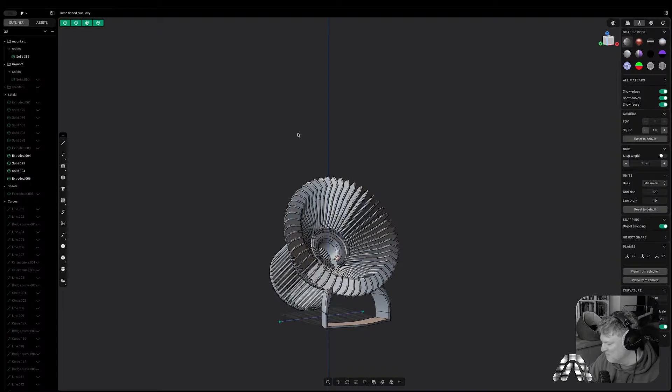The results are in. The book nook competition has finished, and I'm really unsurprised to announce I didn't win. So should we have a little look at who won though? Because I have to admit, it's really, really good. Let's just have a little look first, because I have to admit, and this is no slight on anybody's work, some of the ones that won the backup prizes, they're good, but I think mine was better, but I'm allowed to think that. Contests, here we are. But the winner, brilliant. Let's have a look.

So actually the winner isn't the one I liked best, now I think about it. It was this one I liked best, the Reader's Emporium, which, you can tell they put a lot of effort into it. The June one's pretty cool. The Victorian Clock Tower is pretty cool. They went glueless snap fit. I went no snap fit, glued.

And I'd seen this one knocking around on Instagram for probably about a week and a half beforehand. And it's such a cool concept. It swaps, I think it swaps anyway. I think that's what they're getting at here, that it swaps the interior when you open and shut the door. Yeah. Which is a really, really cool idea, actually. I can see how that one won.

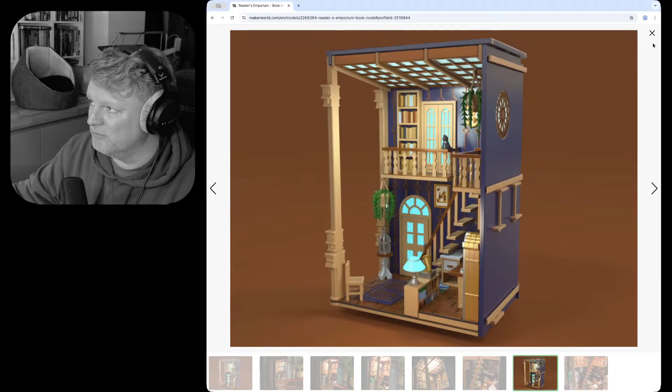I love this plant. Absolutely love that detail. And I love this skylight as well. That's such a good idea. I wish I'd thought of that, actually. They do a lot of changing filaments at a layer to do this two-tone effect, which, if you remember on the streams, I said I really don't want to get into, because it requires people to know what they're doing. In the past when I've done it, you end up with loads of comments saying it doesn't work, the printer started beeping at me halfway through. So I tend to stay away from it, but it's got great scores, so maybe I just underestimate people.

But yeah, so that's pretty much the book nook summed up. I probably am a little bit disappointed I didn't get one of these excellent participation awards. But you know what? I wasn't doing it for the competition. I was doing it for something that was good for the stream and was a bit of a longer project that could take up a couple of streams, which it did. It took up twice as many streams as I thought it would. But yeah, there's some really cool ones in here. Look at this bad boy.

Too cute. Right. So today I will openly admit, about an hour and a half ago, I didn't have a clue what I wanted to do. And I started just doodling shapes on my iPad. Oh, actually, no, before we do that, let's just have a little look at the lamp from Thursday.

So here it is. Looks pretty cool, doesn't it? You'll notice a couple of changes. I've added in a section here for a cable run so it can stand vertically if people want it to. It can also rest on its side fine at this angle. But I found when I printed it, it was a little flat for my liking.

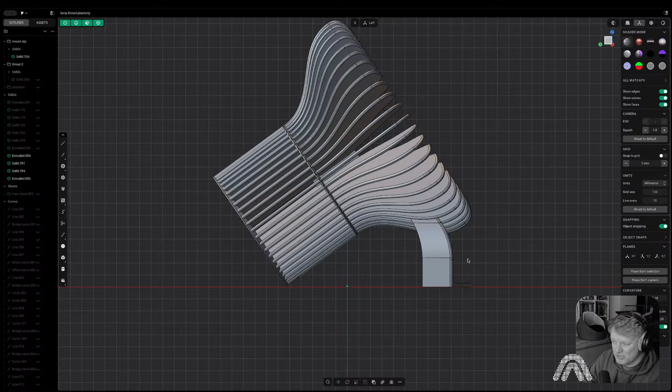So I thought I will do a little stand. Now the stand is currently printing at the moment, so I haven't fully tested this. It works great either way, but I thought, if you just want a bit of a steeper angle, so the light is more upwards, this little stand.

So this isn't the final design, but I'm just seeing how the tolerance is. This basically is just set to wedge in there just to keep things tight. So there's no connectors or anything, it just sits on it. And once I know this is okay, I'll do a bit more design on the stand. Although it's okay, it can be spruced up.

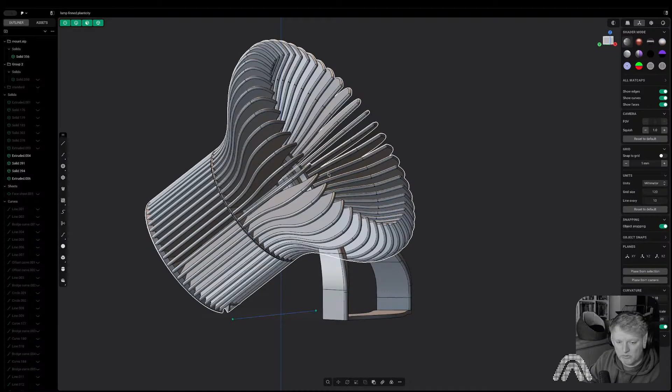So that's the lamp, which I have to admit, the lamp itself has come out absolutely great. I shared some pictures on Instagram and on the community feed on YouTube, and it looks really good. I'm really, really happy with it.

Actually, when I was thinking about it afterwards, I could have really got away without these, because the mount is acting like a rib. So I said on the stream on Thursday that I would prefer if it was clean and it didn't have these braces. And actually, I think I could have got away without them. But you live and you learn.

There is also a diffuser cap, which I think is not in this file that we're looking at here, but I've printed that off as well, and it looks really good. So today, as I said, I didn't really have any ideas for what I wanted to do. I was thinking I want to do another lamp. I'm in a bit of a lamp mood at the moment. I thought, right, just get the iPad out, start doodling some shapes.

And I'd seen some lights online which were like uplighters with bounce at the top. So the light is in the base, it shines up, and then you have some sort of shape at the top which bounces the light out. So it's more of an ambient light. It's not going to completely fill your room with light, but it's an accent.

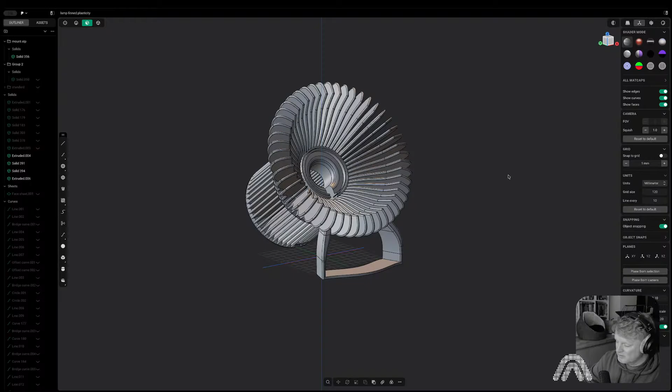So let me get up what I doodled. Now the doodles aren't great because I did them in about 2 seconds this morning. So this is kind of the concept. It's going to be a central cylinder of some description, and the light will sit inside of here, and then there will be 2 individual shade bounce reflectors, and I think there'll have to be 2 because I want to print them in a way that doesn't require 4 kilos of support. And they will then slide down into some channels, I think, in the cylinder.

So from the front, it'll kind of have this aspect. I think I'll probably make these a little tighter. That's a bit much of a gap between here and here. This is a side view, so I'm thinking about a circular top to the, what am I going to call them? Reflectors? Bouncers. I'm going to call them bouncers. And that would be the top view. So the light would be in here and the majority of it would hit the bouncers and shine out.

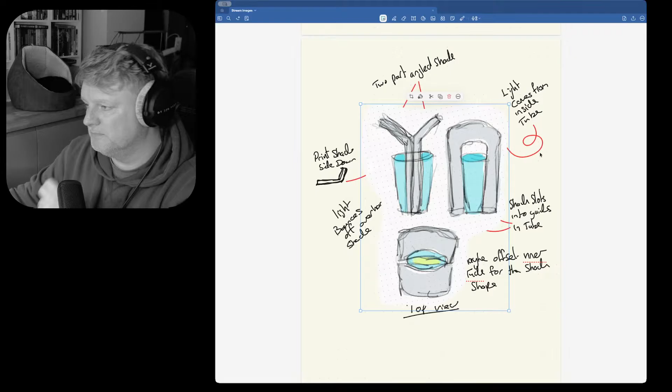Now, I think essentially we'll have to print the shade bit like this. So if you think that's a side-on view and this is the print bed here. If we design it so it can be printed that way, then we get away with any real issues with the overhang. I think this bit here will cause some issues, so there probably will need to be some support, but there won't need to be absolutely tons of it.

But excusing the sketching ability and the child's handwriting, I promise I don't have any children, and I promise I haven't been implementing child labour to do my designs. This is all me, all my original artwork, all my original handwriting.

I think we should be able to design this today. I don't think it'll be too complicated, but famous last words. So let's get over into Plasticity and let's start a new file.

Right. Let's just set a scale line. A scale line of not 1815. That would be a large lamp. So I'm going to do 240, just so I've got an idea of printer build height. Now I am going to bring in my lamp mount, simply so I've got a good idea of scale.

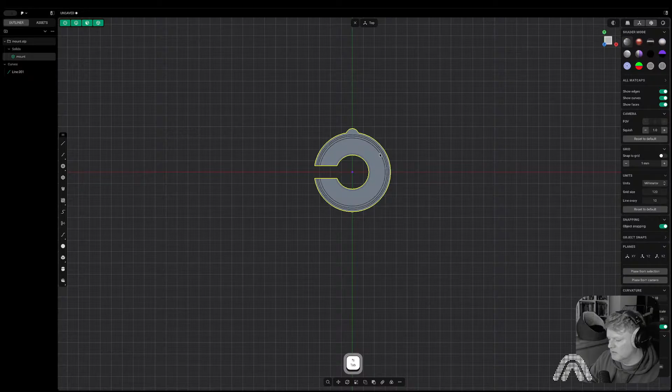Remodel parts, mount. Right, and I'm going to correct the center point because it's never right. Let's rotate it on the Z90, minus 90. So this just gives us an idea of scale.

So this is the bit that I've designed previously, and I use in most of my lamps, that fits the Bambu lighting kit. And even if I actually don't use it in this design, which I might not, it's just good to have it because it gives you an idea of scale, so you know how big the light is and, if you want to add a diffuser or anything like that, how much room you need.

So I think the best initial thing to do would be to draw the cylinder, or essentially the light to fit in. So if we say, let's just go 100, because 100's a round number, and obviously round numbers are better design-wise. So if we imagine, what am I thinking of? I'm thinking probably about there.

The reason I'm thinking about there is because I want the bouncers to go all the way from the bottom to the top. So it's like a full line that bisects the design. So it's going to have to fit in that 240. So like, say for example, that.

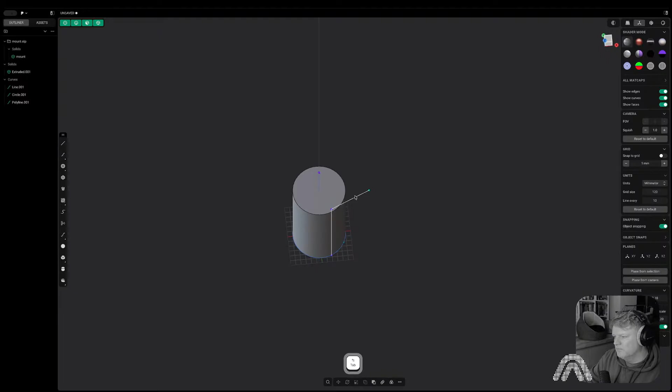But let's just see. So let's bring this into the middle by grabbing it and pressing Y to stick it to the Y axis. Now, first things first, I probably actually want this to be a little closer to the middle, and that probably means I want to bring this in a little bit. Now, let's just do this as a sheet first. The reason I'm saying that is it'll give us an idea of how wide we want it to be, because it's not going to be like this. This is not what I intend at all.

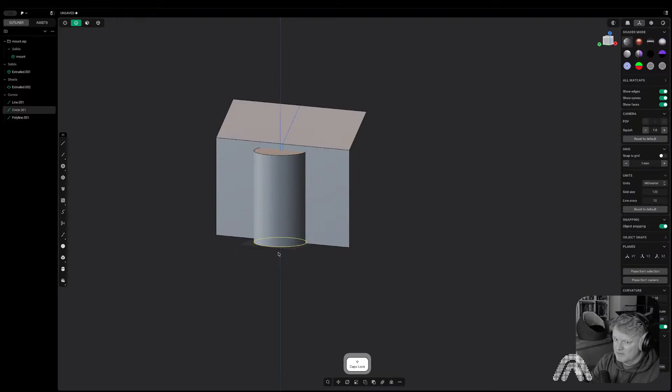But what I'm thinking I'm going to do is, if I take the shape that sits at the bottom of the cylinder and I offset it, that gives us like a secondary circle that we can extrude up. Well, I'll just show you, because it's incredibly simple and it sounds complicated when you're talking about it. So let's just go a bit further. It'd help if I had X-ray mode on, even though I despise it.

Right. So what I'm thinking is, we've taken that circle and offset it so they've got a relationship to each other. I've used it to cut this sheet. So now we have this, which could be one of the bouncers. So I'm going to put a nice fillet on here. Now, this is probably somewhere where there might need to be a little bit of support as well, because notoriously fillets straight off the bed are a big fat no-go. But I like to live dangerously, as they say.

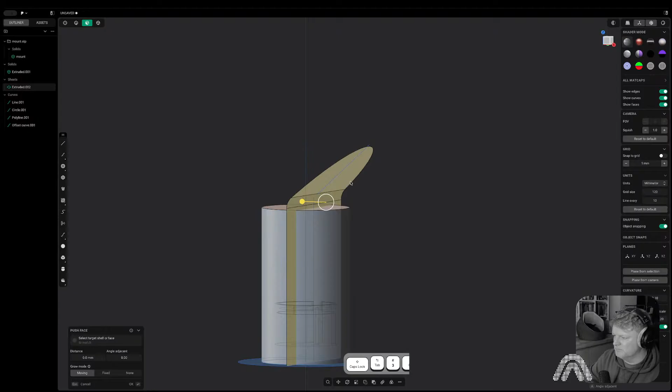Let's actually thicken it rather than extrude it. So F and then thicken. Let's get on the straight-on view so we can see what we feel about its thickness. More than that? Yeah. Now let's just mirror it across. Let's get X-ray off again because I cannot understand things visually in X-ray mode. So, yeah, I think I quite like that.

I think what I might want to do though is bring these in a little bit closer, just because the closer to the middle they are, the more bounce the bouncers will bounce. Yeah, that's better.

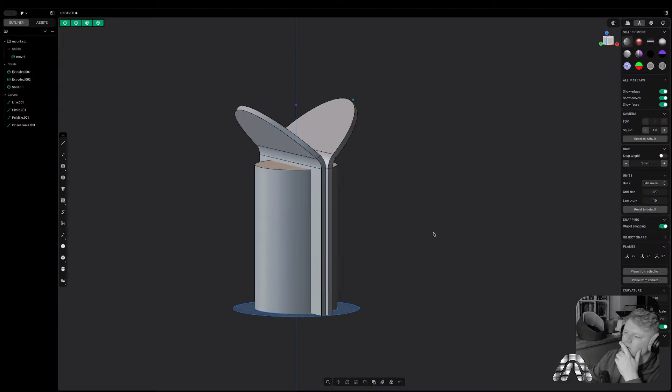Right. And now if we take this circle. This is what's great about Plasticity: you can totally get overwhelmed with curves and having too many curves, and I regularly do, but I'm never too worried about deleting curves in Plasticity, because if you need them, just switch to edge mode with 2, select the edges you want to start with again, press Shift D, and it gives you a curve that's basically stolen from that geometry, which is great.

So what I'm going to do is offset this one in like this, and then shall we cut upwards?

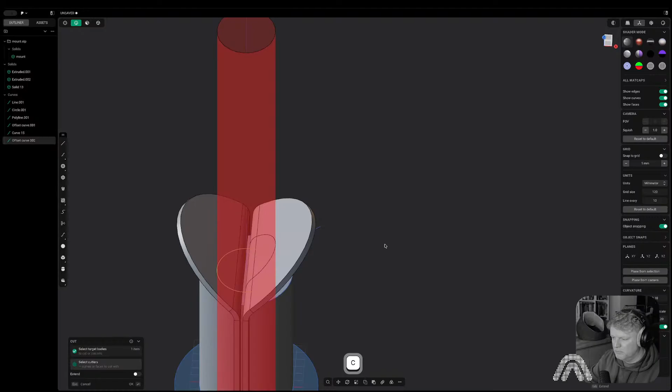So yeah, I think a little chamfer on the outside there. Actually, before we go any further, let's just check how we're doing for intersecting with the mount. Yeah, so we would intersect with the mount. So these actually need to come in a little bit.

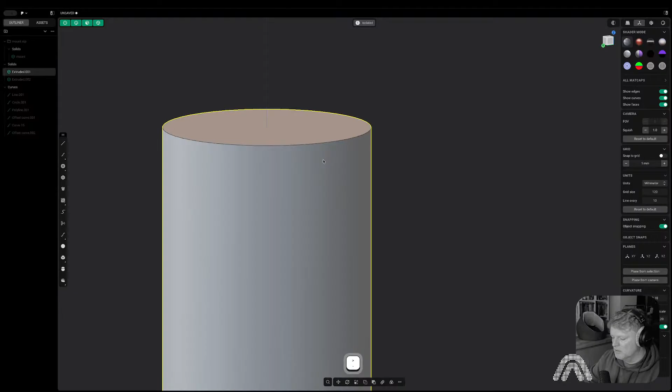It's too... if I get rid of this, you'll see what I mean. So you see how this is hitting the mount inside. So if we have this slide down inside the other frame, you'd effectively have to cut channels in this as well, which would probably be okay, but because it goes across the channel where I have the diffuser, it just limits what you can do. I mean, it doesn't need to be there like that.

So if we do this, just make it a little wider. Yeah. And then the channels that we cut. So let me just do a little test just to be sure. So let's select the main body as the target and then do a Boolean against it. Let's keep the tools. So yeah, that channel cuts in there, no bother.

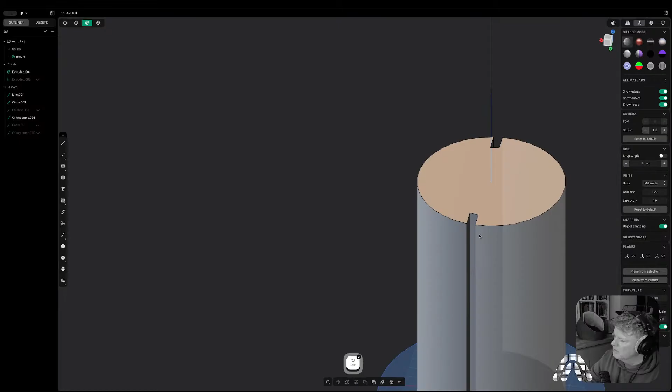So I think what I will do though is I'll just add a little bit of clearance on these. They don't have to be tight, because you want the bouncer diffuser to slide in easily. So let's do minus 0.1, which, do I want minus 0.1? Maybe a bit more actually. So let's do minus 0.2, which is of course on both of them, so it makes minus 0.4. Yeah. Let's do the same over here. And then I think ultimately we can just mirror this.

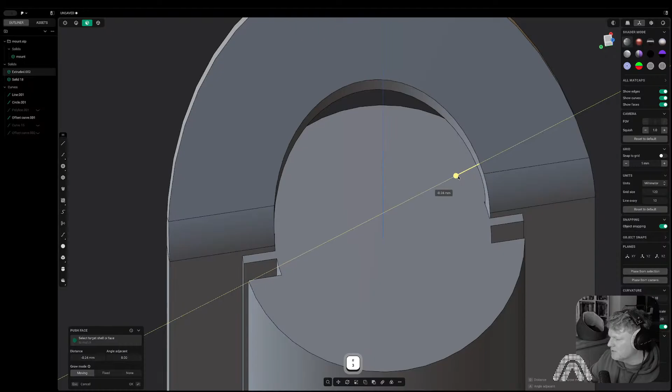Cool. Now, if we bring this back in, just add a tiny bit of clearance there as well. It's not just this and this face, the top and bottom, that has clearance. We also need clearance on this face because the part would interface with it there. So we should mirror this across, just get a look.

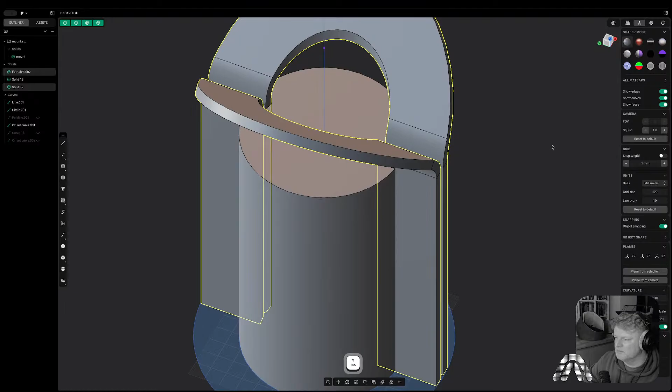I think what I might want to do is, I feel like that's too big an opening. Yeah, that's too big an opening, because if you think the light's going to be in the middle here, too much of it's going to be coming out like that. So what I might do is get rid of this one, because we're just going to mirror anyway, and let's imagine we're here on this face. So this is where the top of the lamp is going to be, so the light is going to come out of here.

So if we do Control R to add an ISO param, having to look around my microphone to see the keys. I really need to get my microphone / keyboard positioning sorted, but it's a little bit difficult.

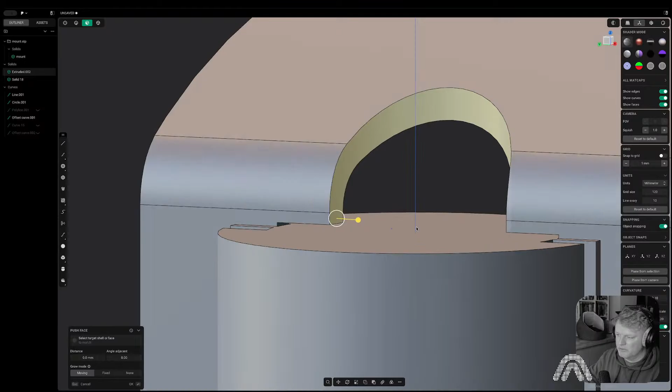So now we should be able to pull these in. Yeah. So we're effectively making the area that the light is going to come up and hit bigger, but we're not cutting into this for the channels. So yeah, that's pretty good. I put a chamfer on this side, so this is the side that's going to touch the print bed. But I think I will still have a little chamfer, but I'll not have them even.

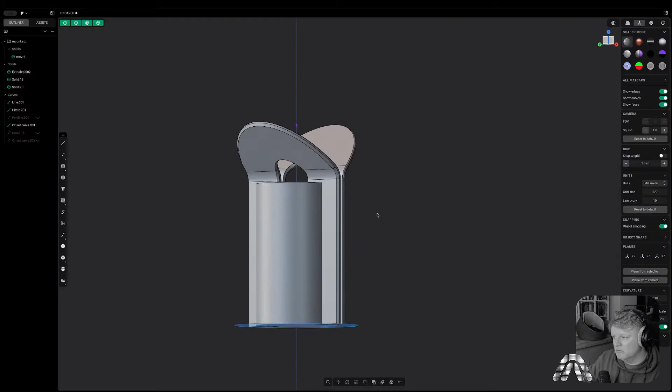All right, so that's the basic little concept. It's a bonkers lamp, as I say. It's more about ambience and looking like a cool, interesting thing on a shelf than let's illuminate the room. But I think some of the coolest lamps ever are like that. Lamps don't just need to be purely functional.

So for a brief period, let's forget about the bouncers and focus in on the actual chassis of the light. So what I'm going to do is hollow it. I'm going to run a hollow command. Now hollow commands and sharp edges, which is what we have in here, I haven't added any fillets, sometimes loop on themselves, but it's fine here. So let's just do 2 first and bring back in. I want the mount, I don't want the bouncers. Just to see how much room I've got, you see.

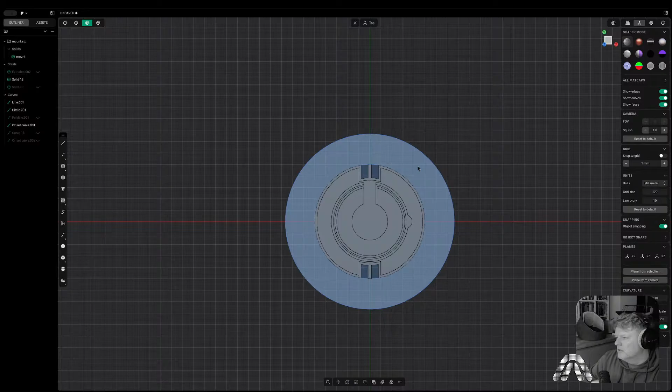So I can make those walls thicker. The reason I'm checking that is because the light will be inside. So really, if they're a little bit thicker, you can get away with more filaments to stop the transmission, because if it's really thin, you'll need a dark or a matte filament. If it's a little bit thicker, you're never going to get away with white, but you can sometimes get away with like a blue, or I've actually done the turquoise a couple of times that Bambu sell, and that can be quite good for stopping transmission. The best though is charcoal.

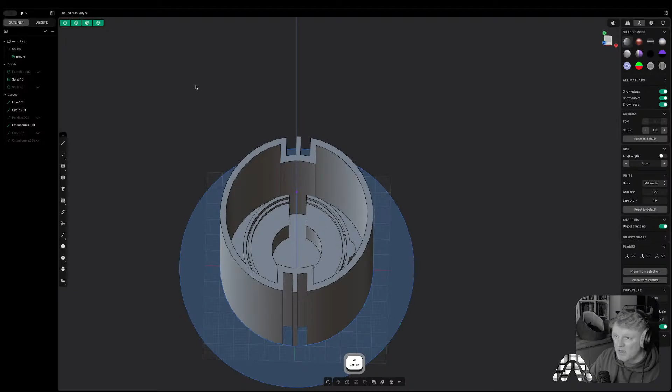I've already got it behind me and I will at some point finish it and show it on stream, but I've actually designed and built an entire home NAS. Actually, do you know what, I might just get it up on stream so you can have a quick look. Let's save this first though. Let's just go into lights, let's just call this bouncer, save it. But yeah, just have a look at this absolutely bonkers thing that I built a while ago - 3D printed server. There it is.

Let's just go merged cage version. Yeah, bang, look at this bad boy. It's really cool, it works great. I have to admit, all I need to do in my one at home is add the second cage, and then do I have the front panels?

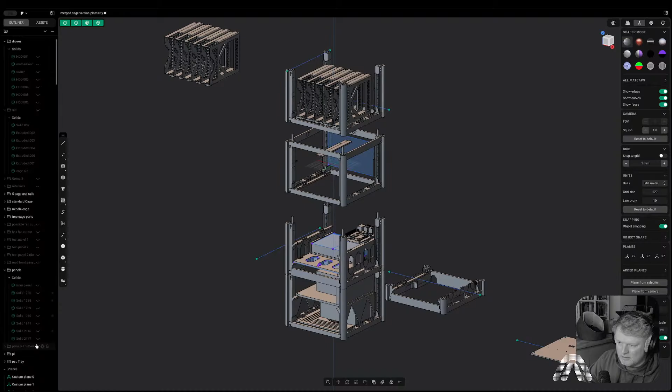No, I don't have the front panels on this one. And then there are curved front panels which go on all of this to make it one vertical unit that can actually just get extended by adding more of these drive cage mounts. Motherboard, it holds motherboard, holds a network switch, the PSU. It's also got this shelf up here to put some Raspberry Pis on if you use Raspberry Pis in your home lab setup.

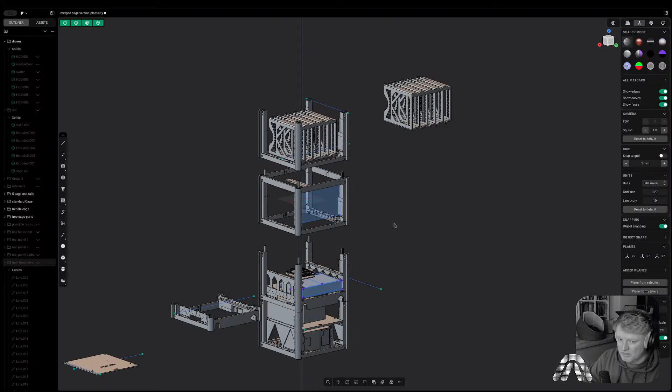But that was a big one I did in October. It's not on MakerWorld because I haven't personally finished it - well, it is finished, but I haven't printed and built it out, and I'm not going to upload it till I'm 100% sure I'm happy with it. So, but I just thought it's pretty cool, I can't even remember why I mentioned it now. But yeah, look out for that in the future.

So back to the light. So we want this, not the top necessarily, because we want it to be funneling the light up through the chassis of the light anyway. Now, one thing I do need to think about is the cable exit.

I think what we'll do is we've got two options here. So the disc light, the LED light from Bambu sits in here, and then the cable comes out. Now, obviously the cable would come out where we're going to put these little bounce reflectors, which wouldn't be ideal to stop them. So we've got two choices really.

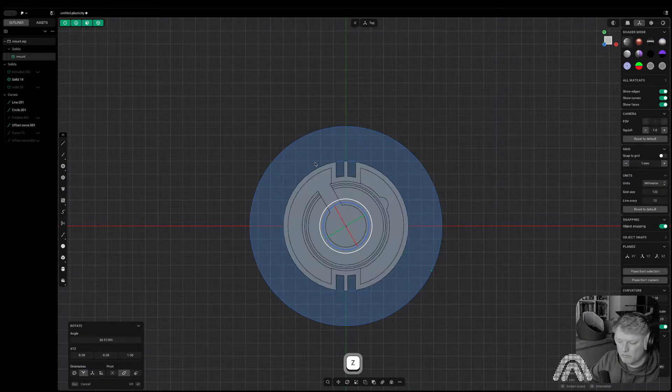We can either rotate this slightly and just have the cable come out non-centrally, which is the easiest option, but for some reason I find incredibly triggering, so I'm not going to do that. No, I'm not going to do that. I promise I'm not going to do that.

So I think what we'll do is we'll actually fill in here a little bit. Oh, but that's not going to be - I don't know if I like that solution either.

So what I was thinking is you could essentially have the back bit here, these fins be a bit shorter, and then have the cable come out underneath. Don't love that solution either now I'm thinking about it.

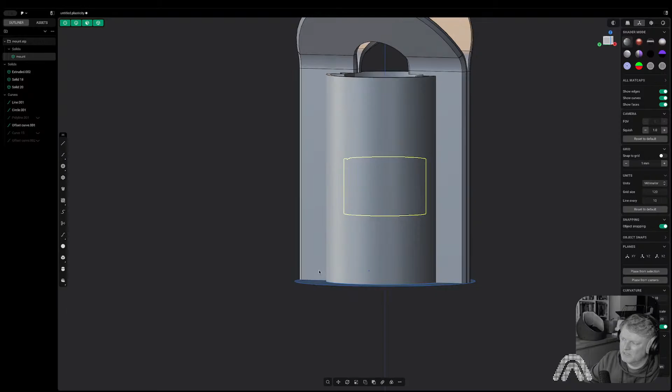Because if you have the light on a shelf like that, for example, it's not so bad that you could see it, but if you wanted it sideways, you'd then have this section here missing where the cable would come out. I think that would look crap.

I shouldn't have made a promise, should I? Because actually, I think it probably does make sense to have the cable come out slightly on an angle, because then you've got options. If you want to display your lamp slightly on the side, you can display it the way that the cable comes out that way. Yeah, I actually think that is the better solution, even though I made bold promises.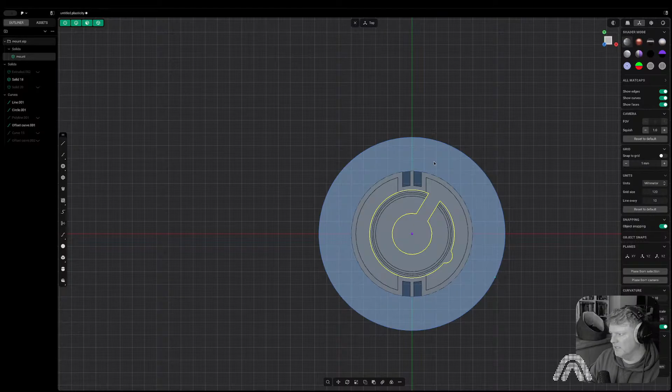And thankfully, there's zero accountability on the internet, so I can go back on those promises with absolutely zero guilt. So let's just rotate this a little bit and let's have here be where the cable comes out. So the puck will be here, and then we'll put the hole for the cable here, and then we don't have to mess with these rails or these guides for the bouncers at all.

So what I'm actually going to do is just take these lines, duplicate them. Let's bring them down just so I've got some idea without having to have X-ray mode on where that cable channel is. And then I can just draw straight vertically down.

Just make a little surface here. Need to make it a bit bigger.

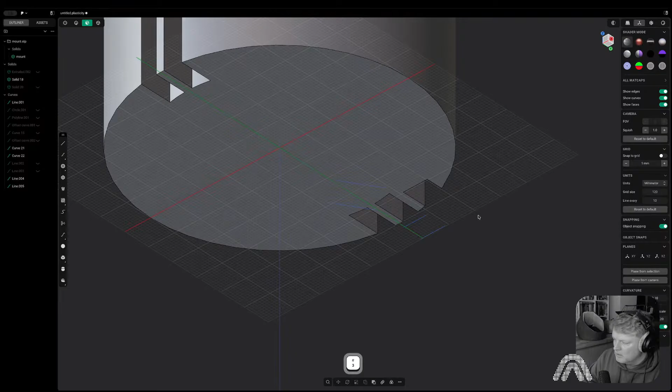Hide some of these because they get in the way and you can't select faces. So that is going to have to be bigger, because top tip if you're ever designing for the Bambu lighting kit, it's a wonderful cheap light, but if I had £1 for every time I've designed the lamp and forgotten that the cable has a switch which has to fit through this hole, I'd have about £3. Let's just make this a bit wider, a little bit taller.

Actually, how big is that? 14mm. I don't have that lamp on me, but I'm 99% sure that's fine.

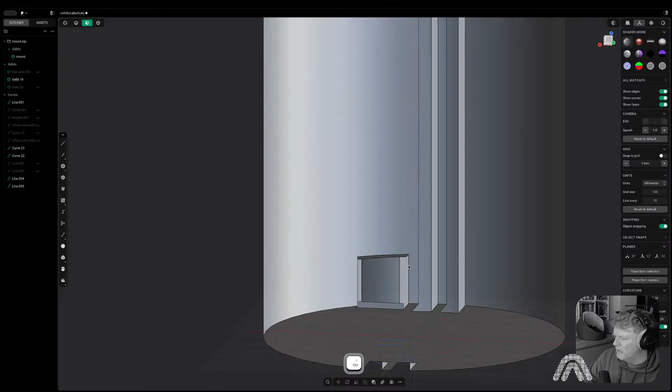Let's bring this to here, just so everything's nice and flush. And if we put in a couple of, what you prefer to do, you can do - what I'm trying to do here is get rid of any overhangs, to get away with zero supports if possible.

You could just add chamfers like that, or you could add fillets and overdo the fillet so it goes past being a full fillet and you get this arc. If you keep going, it gets a steeper arc, which I prefer the look of. Then we should be able to just select these faces, grab on the Z, pull it up.

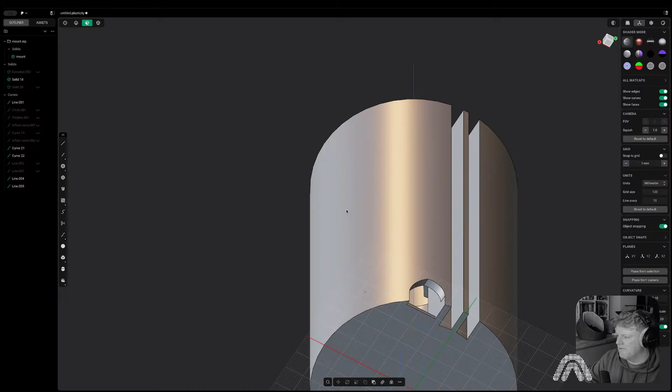So let's get a section analysis on, just to have a little look inside. So another thing - obviously this is free floating, so this would need supports in here, which would be defeating the whole point of trying to avoid supports.

So I could just pull this down, but that adds loads of material. It's completely pointless. So I think what I'll do is I'll actually join it to the body.

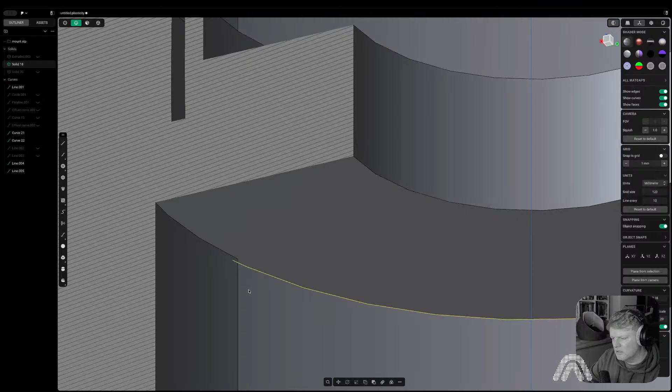We definitely don't need all that because it's just not needed here. And then - oh, what's going on there? Am I not? Oh, of course, it doesn't touch on the outside, does it? Right.

I think we're gonna have to extend this all the way out so it fills that gap. Because now, obviously, I've just talked about not wasting material, and that reads a little bit like I'm wasting material. But there's overhangs, and then there's overhangs which are circles, which are absolutely guaranteed to fail. So we don't want that.

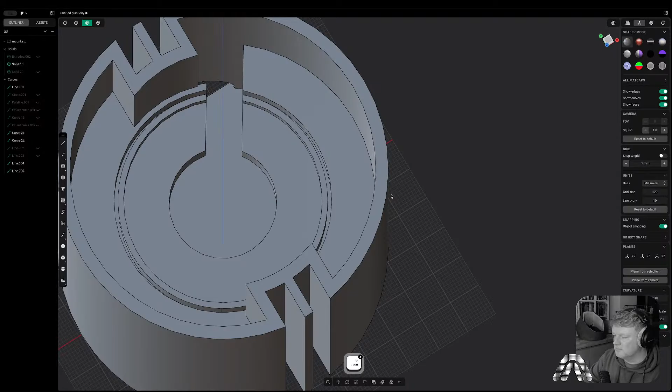On this face here. Right, so now we should be able to just put a nice chamfer in on the bottom here.

And then we're getting away with using not as little as possible, because there's definitely ways you could do it. Has that gone all the way around? Yeah, it has. Let me just double check that.

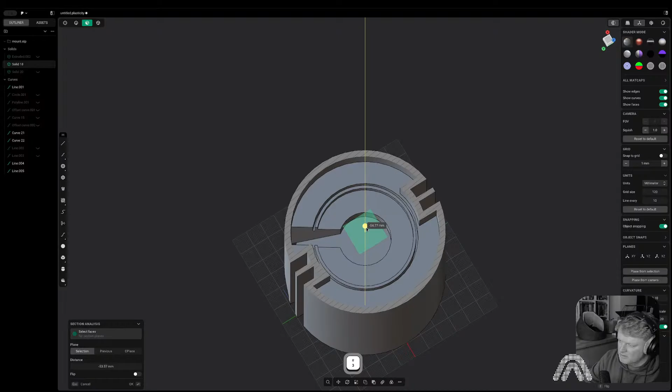So selecting that face and then selecting section analysis means it's on there. Yeah, all the way around.

It's actually quite a good way of guessing what the slicer is going to see. So down in this bottom corner there, you can see that's quite a steep overhang still, but it should be fine.

That's all good. I'm going to bring this out. Just noticed that this was...

How do I want to do this? Yeah, I'll just draw the circle again. And then steal this geometry. And then that gives us that.

And I can just pull - don't necessarily care about it being the same, but I just want more area for the print bed. More is always better.

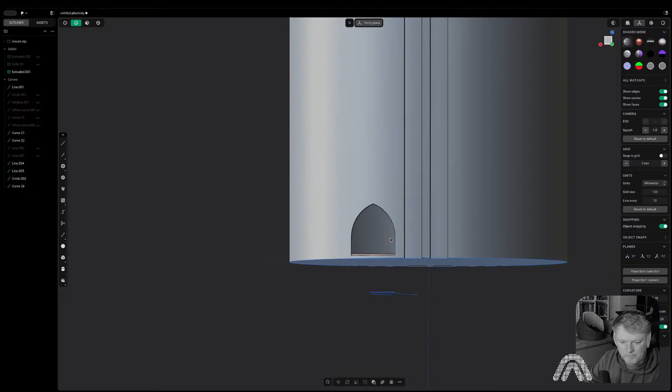It's like a little mouse house. Now, I don't like this straight top.

Let me pull in the bouncers again. So what the question is, do I want that kind of curve? I don't think I do. Or do I want that kind of curve? I think I do.

So what we need to try and do here is - yeah, it'd be a good idea to just add some guidelines first. So all I'm doing here is adding a line that I know is on the center, with a known point that I can start drawing my curve from.

Then I can draw it to the center, and then I can draw it the same on the other side, and then I know I'm getting a nice arc, and then I can scale this in the X direction if I want to change. So if I do spline curve and I go to, let's just say here for now, and then to there like that, and that gives us a perfect little arc.

So then if I bring that down and I do a cut, yeah, I feel like that actually makes a massive difference.

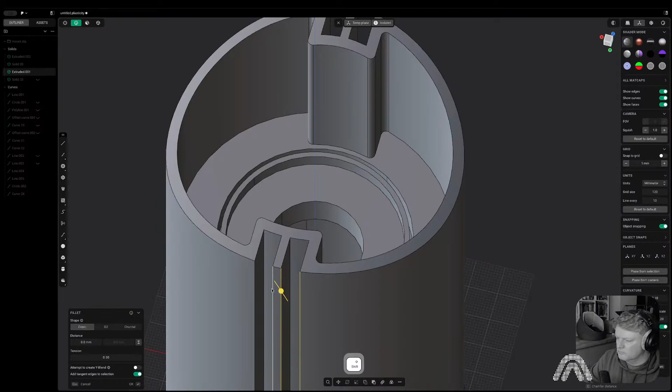So say, for example, now I can select this edge here. And you see how it takes the whole run? So I'm selecting this one edge and I can actually select everything because of these fillets. If they were still right angles, it would stop there. As you can see here, because I didn't fillet the insides of this, it stops at that right angle, which sometimes is actually quite handy.

I think I might actually chamfer these. I don't know why. Don't want to add a fillet internally here because we'll have to do the same to the bouncer parts.

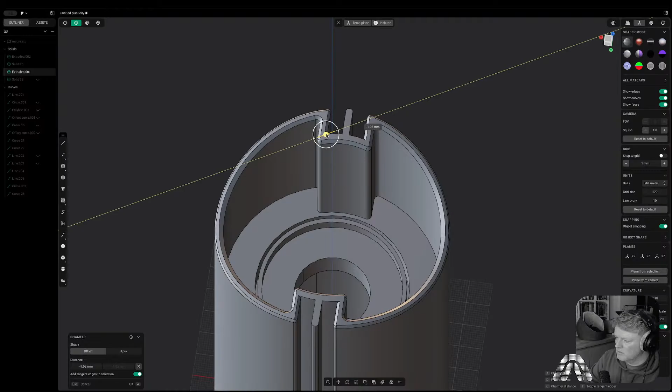Let's have a look with these back in. Quite like it. Of course, we added that curve, so now these don't match up with the surface because we chopped a bit off, didn't we?

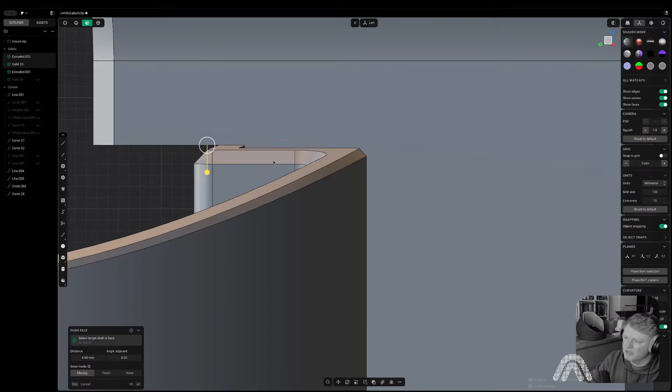So let's just eyeball it. There you go.

So I'm thinking, this is the bit where sometimes when I design stuff and it's relatively quick, I look at it and go, right, what more should I do to it? But I don't necessarily know that I want to do a great deal more to it.

I think I could add, I think I might rib this. So let's just take a copy of it. I actually think I won't need the ribs. I think what I would do is print this with fuzzy skin.

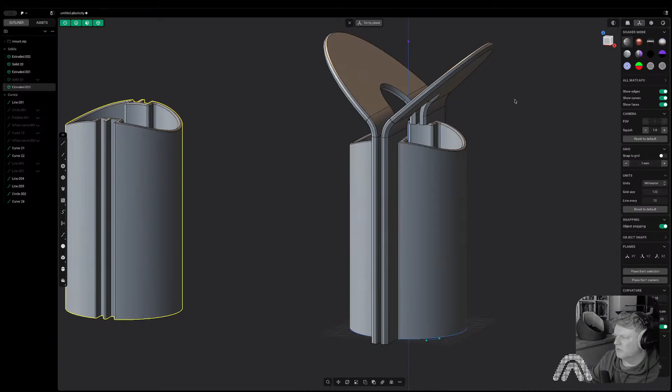I feel like I might want these a bit thicker, but let's just... So I can actually bring just this face out a little bit to make them thicker.

Then they're not with this. I mean, I could just select these two and then redo the grooves, which wouldn't be an issue because we've got plenty of room on the inside.

But I think I prefer them. Let's just have a little look. That's just ridiculous, but I just want to see what I feel about thicker. Yeah, I prefer thicker. Super.

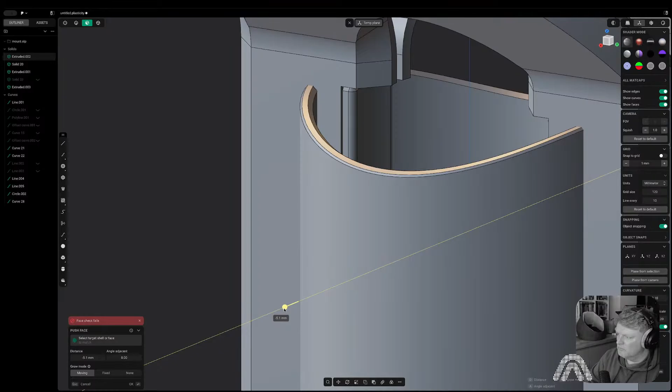So glad that I did all that filleting. But that's too thick because that will actually come. No, you know what? Do I actually? Is that what I want?

I think that's a better middle ground. Feels a bit more substantial than this.

So we'll have to add some material in the middle here, which, because I added those fillets, see how easy that was to select all of that face? So selected everything together. So now I can just add, not too much, because there'll be a point where the corners will intersect with each other.

See here? So once that starts to go over there, it has a little bit of a computational nightmare. But can I get rid of these? Can, but I'd have to do...

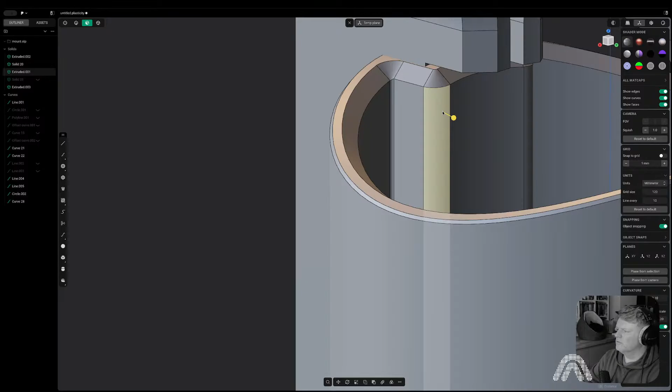Let's just do this so it makes it a little bit easier to add the thickness we need. I'm just going to take some of these fillets and chamfers. Fillets and chamfers, not the whole thing.

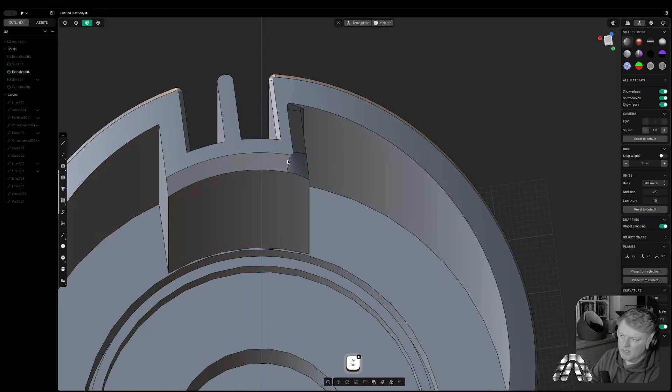Just means we can re-fillet them once I've got the dimensions that actually want with the thickness of the bouncers. I don't know how many times I've said bouncers, and it's a ridiculous word for what I'm trying to communicate, but so

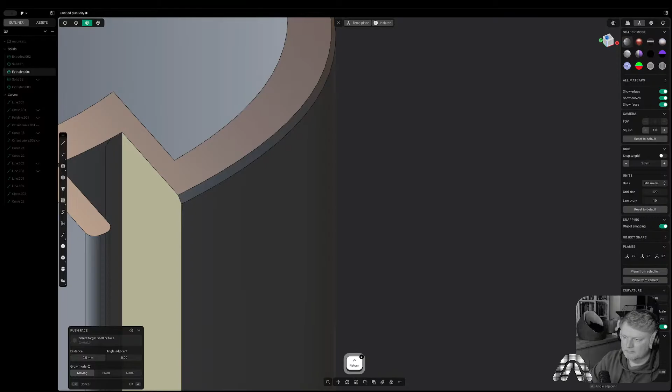Let's get this, take away this, so it's cut away this extra area here, keep the tools. And just add a little bit of that clearance back in. Do the same on this side.

Right, now let's just... No, let's not just mirror it across, because actually we can. Watch this. Yeah, we can mirror it across, but I'll just have to separate inside first, because obviously this is...

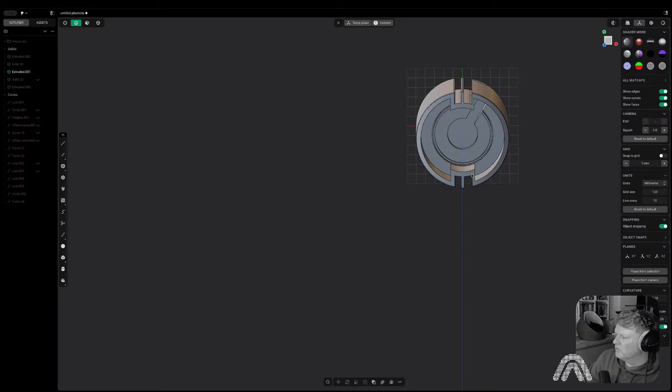Oh no, I don't want to mirror it because I've got that hole there, haven't I? So let's not mirror it. Let's just do it properly. Although, no, I can just do this.

He says with unbelievable confidence, might I just add. Wicked. So that's effectively just, because I cut that out and then I mirrored it. It's just mirrored this section. So I've not then re-mirrored the hole and all this mount.

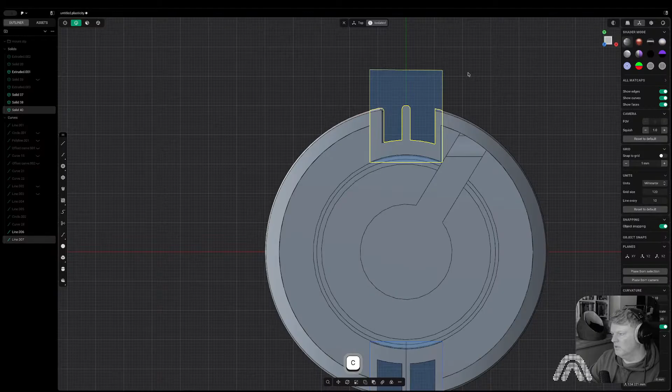So let's actually mirror this up to there. Cut that out. Be shot of that part, and then can I select these two, and can I mirror them up? No, let's not do that. Oh no, it does, fits perfect.

And then boolean them all back together. And don't keep the tools because I don't need them again. So now, if we get rid of this, I won't get rid of that one, I'll just hide it, and we mirror this one across.

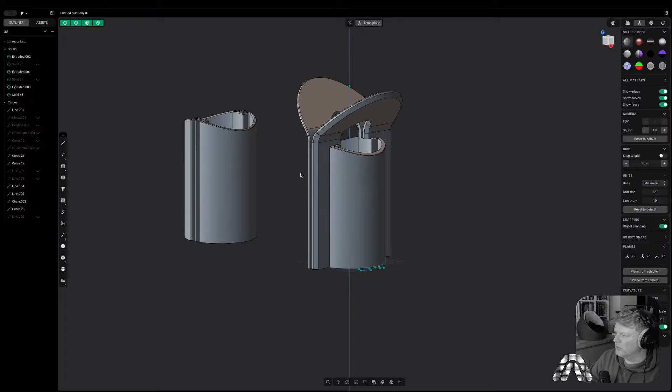Yeah, that was worth doing. They look better. Yeah, definitely prefer that. So

Shall we add back in? I actually don't think we need the internal ones now because it's set, but it does look a little bit nicer when there's a bit of a fillet there. And actually, you can see these edges, so let's just fillet them anyway. Takes seconds.

So get rid of this because I'll only end up printing it by mistake and it's no longer fitting the bouncers. So that's my backup. Now, I think what I'll end up doing is printing fuzzy skin. The only thing I have to be careful with the fuzzy skin is

fuzzy skin, effectively what it does is it takes your model, and when it does the paths in the slicer, it adds a little bit of wobble and a little bit of wibble to give you a texture, but that is at the expense of the dimensions that you modeled. So if something's 10 centimeters wide, with the wibble and the wobble, well, you can actually set the distance in the slicer, it might be 10.8 or something like that.

I can't remember what the default is, but say, for example, here, where we want these to slide into here, if I was to print this fuzzy skin just by default with no changes, it would probably take away the tolerance we've added. So I'll probably have to select these faces in the slicer when I do the fuzzy skin, or I could just add more margin. But adding more margin means if I don't do it fuzzy skin, or somebody prints it without fuzzy skin, they'll be rattly.

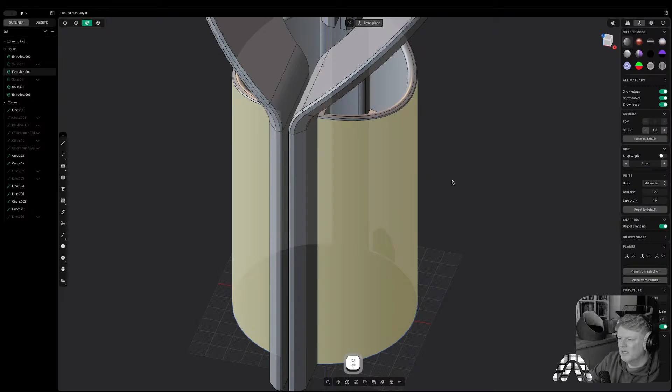And one thing I have learned is lamps sit on the side and they don't need to be moved, they're very stable static things, but for some reason people get really upset when things aren't tightly glued together. Anything that moves even a little bit tends to be the only thing that ever gets said about my lamps on MakerWorld. So I do try to make things have quite a tight press fit tolerance.

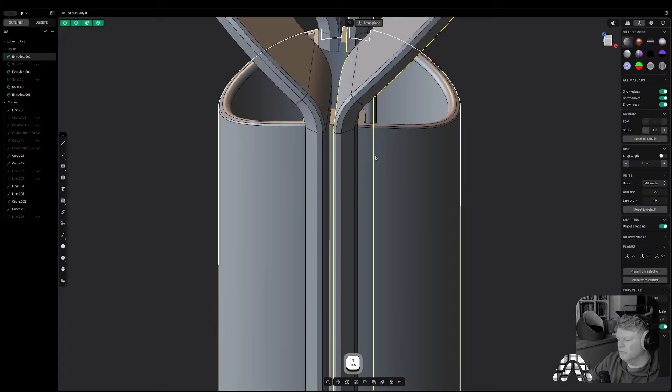Imagine you just did fuzzy skin and you had all three sides adding, say, 0.8 or 0.5 with the fuzzy skin, it would close that up to the point that they wouldn't be able to fit in there. So what you would do in the slicer is just do these faces, potentially with a modifier. I think actually you can now paint fuzzy skin, so possibly you just select the face, but I'll have a look when I put it in the slicer.

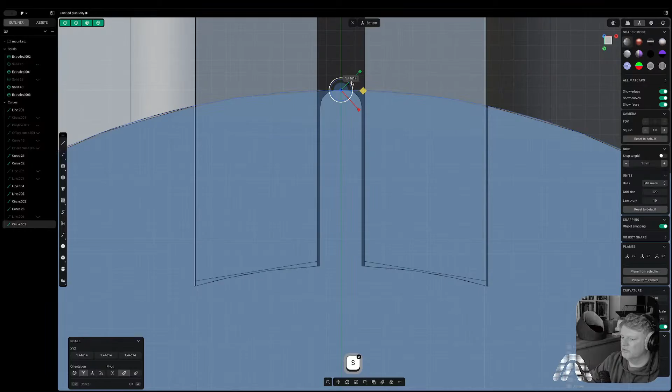But in addition to a smooth one and then a fuzzy skin added in the slicer, let's just add a ribbed version for your lighting pleasure. The way I'm going to do it is, should we do 1 millimeter? D1. 1. Bang. Is 1 millimeter ridiculous? Yes, it is. Let's do 1.5. Well, let's see what it looks like. So let's select this. Has this selected it all, or has it got a sneaky little slice? No, it's all right. Let's pull that all the way up to the top.

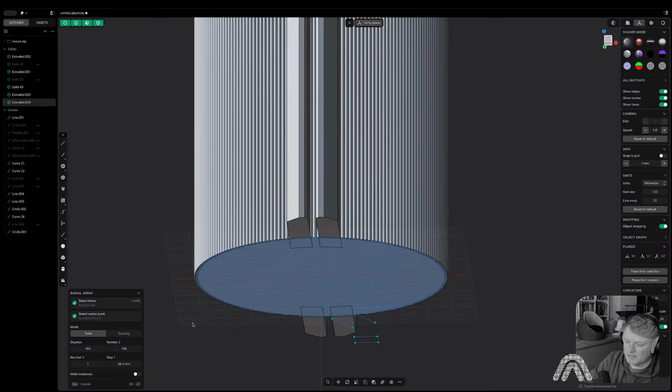And let's now do a radial array and just add 6.3 million of these things to get a texture. Even number. That is an even number. Yeah. Now, 196. Do I dare Boolean? I do. But I save first. Actually, do they touch? Well, yeah, they do touch. Right. Fingers crossed, guys. I'm going to do Boolean on 196 things at once. In Fusion, this would definitely kill it.

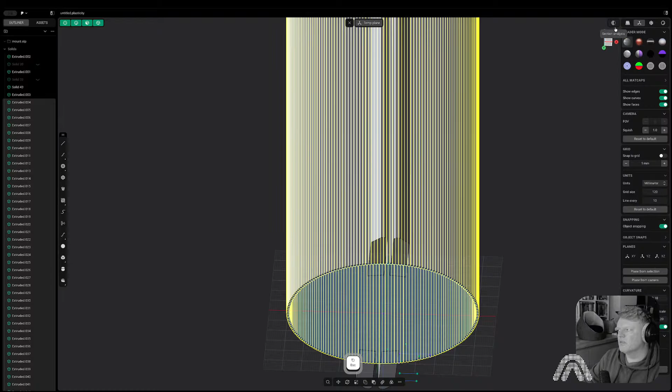Oh, that's literally done it straight away. I actually expected to have to sit and wait. It hasn't. So they mustn't touch. Oh, they don't, look. I want to do this then. Might just do a few more so they actually touch, which is a ridiculous way to use radial arrays, but let's just keep adding them. Yeah, so now there's this intersection here.

So now we can really see whether, right. Oh, I didn't even get a chance to get my cursor there. Did it straight away. Bang. I don't know, Plasticity is excellent. I think this machine is also excellent. And to be fair, these are all very simple shapes, but I have seen things explode before.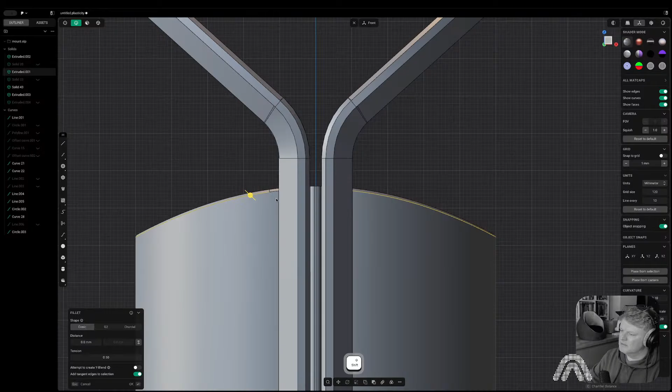So let's just hide this for now. And what we want is this line, and is that different? Fingers crossed when we press delete redundant topology here, it just gets rid of it. Didn't. Why is that there? Why is that different to the other side? I don't know, and I'm not going to get obsessed with this. Is it the same on the other side as well? Yeah, it is. So it's obviously something when I mirrored it, but it really doesn't matter.

Do I have that original curve that I used to do cutting? I do not. Remember me moments ago when I was saying you can just steal geometry back, so I delete things all the time. But, oh, actually, to be fair, just use this.

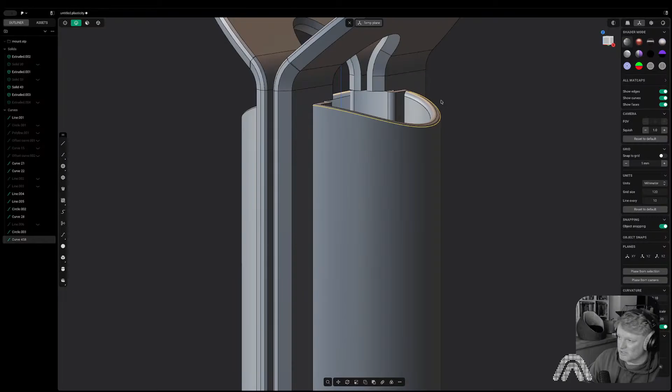Can we just use this? Let's just try and extend this. So what I'm trying to do here, I'm just chuntering away at myself without actually explaining. I'm just trying to get a line that I can cut all those pipes with, so we're just on the body. There are other ways to do it, but don't, yeah, that won't extend, right.

Just go scale on the X0. Just to get it flat, so it's planar rather than curved. Might now actually let me extend it. Whoa, look at that for an extension. Hey, thanks, Plasticity. That's exactly what I meant. Not.

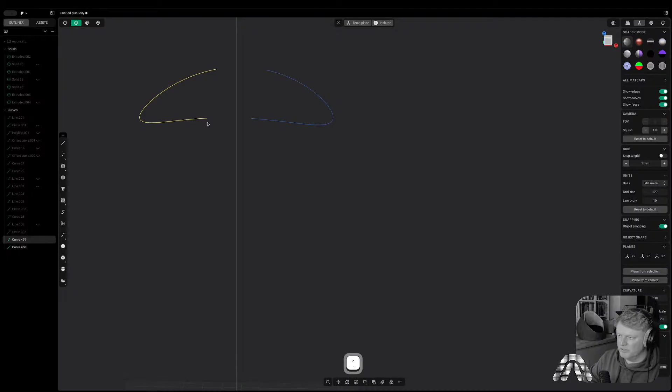Maybe it would just be easier if I did this. Shift D to duplicate those, and then if we get these and we isolate them, and then we do this point to this point and we loft, we just assume G2 is what we need. Make a surface out of it.

So now if we pull back our pipes, actually we need to extend that out, don't we, because it doesn't go far enough. The mathematics that must go on when you're doing stuff like that, because it's bloody magical. So let's select this and then this and do a Boolean.

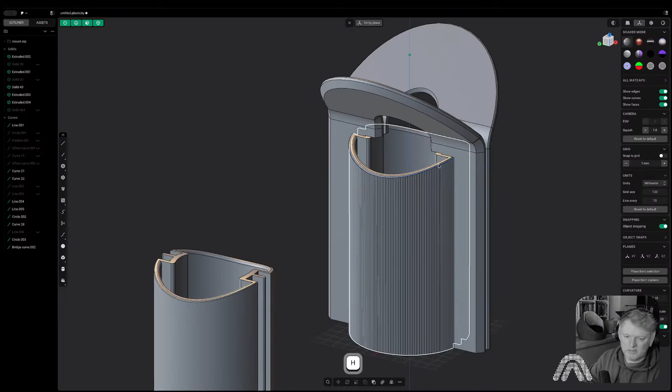Oh, would you believe it? Look at that. So now we have this ribbed pattern which goes all the way around. Well, actually it doesn't go all the way around because we need to get rid of it here. Because obviously then the things wouldn't be able to slide in, but that's not a problem. But it nicely comes up to this edge here. Yeah, that's great.

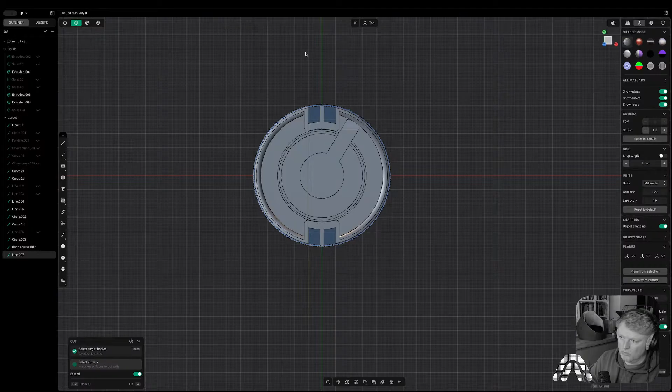So let's just take this line, scale the line on the Y, make it really long. Actually, I don't need to do this because they added this great new feature in Plasticity. What I was trying to do there is make that line long enough that it cut through the whole thing. But you don't actually have to do that now, because if I select this and then I select extend, it automatically extends it to make sure it goes through the whole body. Which is a super little feature, but it's a massive time saver.

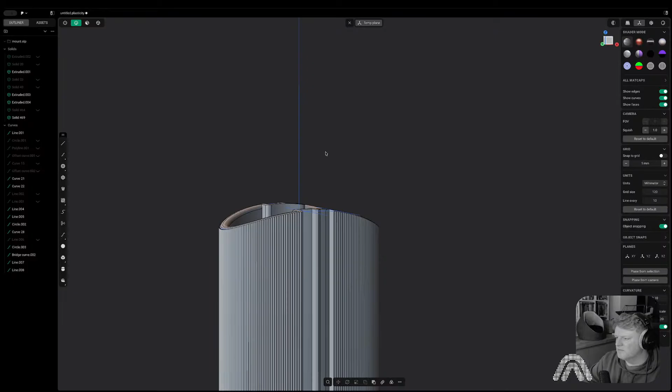Could zoom in rather than trying to pick 1 pixel. Let's just add some little fillets on here just to make my brain feel better. Yeah. So we didn't do an even number the second time around because it's not the same on the other side. But whatever. It's 0.5 millimeter different on one side to the other. And let's Boolean all of those together.

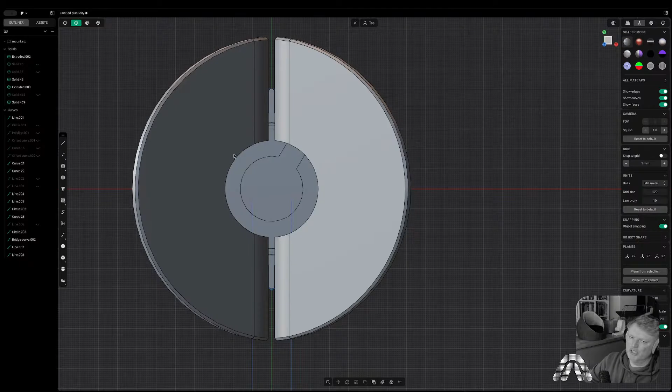All right, cool. So let's bring in those two bouncers again. Not that bit. We got rid of that bit. So light sits here, shines up on these, and just gives you a little bit of a glow and a little bit of bounce lighting. Now, I could add something in here. Some sort of coloured cap, so the light that comes out the middle here wouldn't be entirely wasted. It would give a little bit of colour.

But I think what I'd rather do is test this print first and just see what I think. I actually think it's pretty cool. I like it. It's very modern. It's very different. It's actually weirdly got a little bit of a feel of garden lights, which isn't really what I was going for, but we're here. This is what we are.

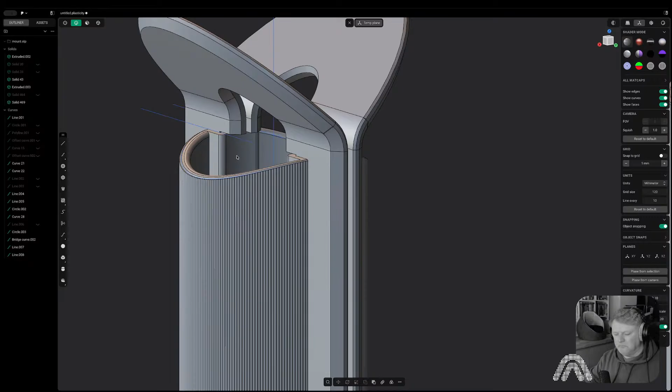Do I want to put in? Yeah, I think I might actually put in a little. Let's say fillet now. I don't actually think that's particularly good. Let's not do that. I think this might be the point where I go, it's finished. Or it's ready to test. It's not finished.

See, we missed something. The hole. The hole got covered when we did the ribbing. So, but it's okay, because what we can do is we can pretend that this is a great lesson that can be taught, and I didn't at all do that by mistake. So scale Y0.

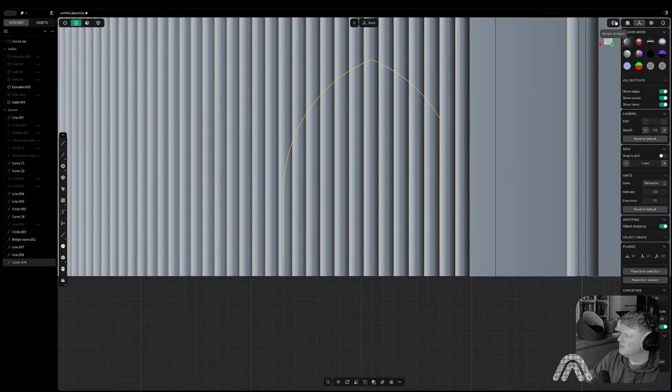Let's just do a little section analysis to have a look at where we think the flow is. Okay. I'm getting something wrong here and I can't quite figure out what it is. Why?

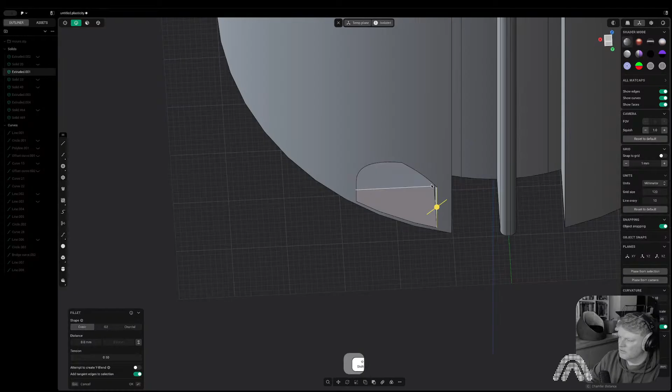I'll actually just do this instead. So get rid of the section analysis. Don't join these yet. Get just this. And then we can grab the direct geometry.

And then if we bring back that side's pieces, and we cut it. Yeah, that definitely was what I meant. I actually didn't realise until relatively recently that the cut plane goes based on your view, or as near as it can do. Must have just been doing it automatically without realising it, but there we go. Perfect. I'm actually not going to join them just in case there's other changes I need to make in the coming hours once I've tested this.

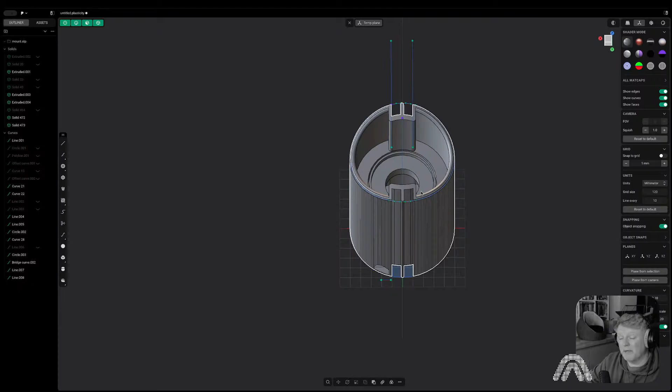Will this go on the test today? Depends how the stand goes for that lamp that we showed at the beginning. If that goes okay, then yeah, I'll get these on today. I actually need to pick what I'm uploading today to MakerWorld. I haven't uploaded anything yet. Did some nice organic vases that I might add. Yeah, I think that's what I'll do today.

But I think that will do for today's design. I was hoping that I was going to be able to time bringing all the parts back in beautifully there, but I didn't. Oh, hey, there's another thing. Nearly missed it. So it cut all the way through, didn't it? So let's join those back.

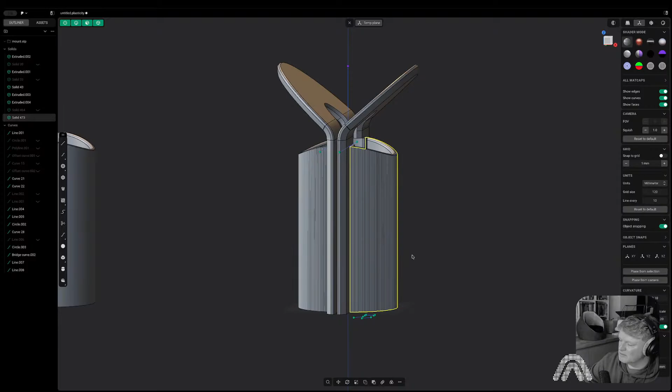Yeah, I think I'll print the ribbed version. I actually really like it, as much as I was saying that I thought I could just leave it like that.